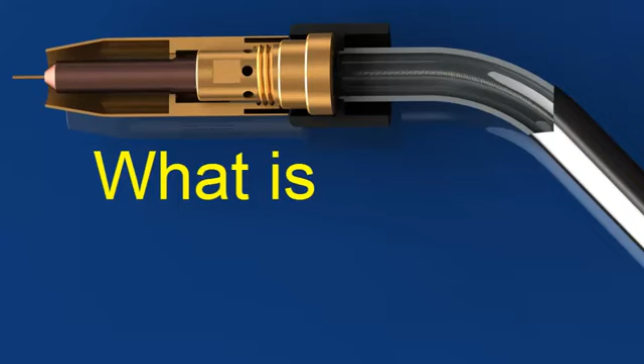What is MIG welding? MIG stands for Metal Inert Gas Welding. The American Welding Society calls this process gas metal arc welding, or GMAW. You might also hear it called wire welding.

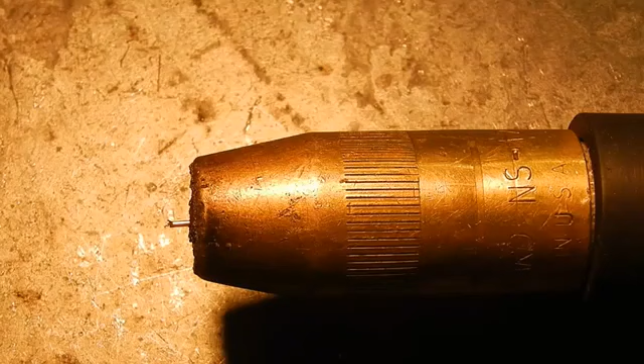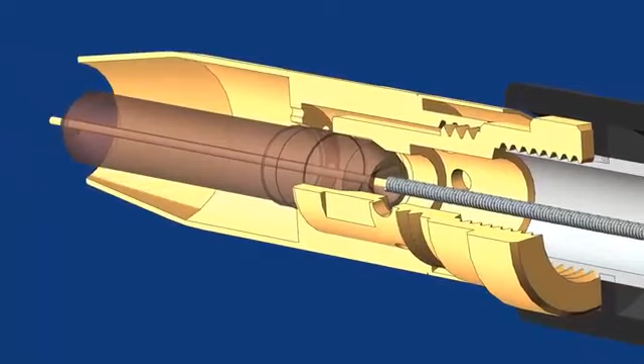In MIG welding, a thin wire acts as the electrode. This wire is fed from a spool mounted on a gun or inside the welding machine, through a flexible tube and out of the nozzle on the welding gun or torch. The wire is fed continuously when the trigger on the welding gun is pulled.

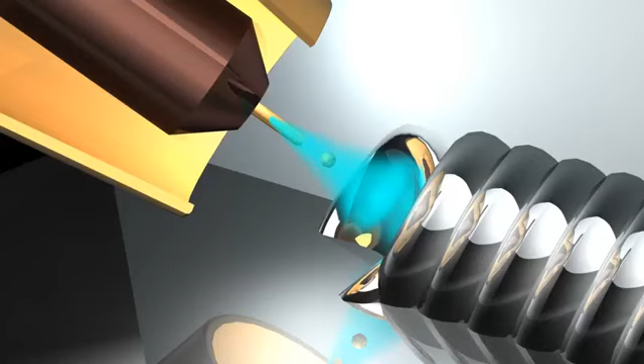When this trigger is pulled, it also switches on the welding current and a shielding gas. An electric arc forms between the wire electrode and the workpiece and heats both metals above their melting point. These metals mix together, or coalesce, and solidify to join the workpieces into a single piece.

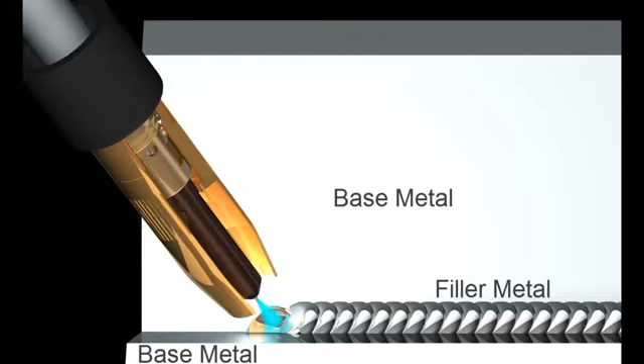The metal in the parts to be joined is called the base metal, and the metal that comes from the melting wire electrode is called filler metal. MIG welding always adds filler metal to the joint. Because the wire electrode melts as it's being used, MIG is called a consumable electrode process.

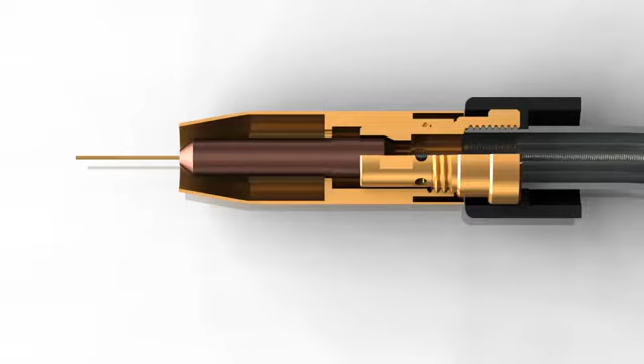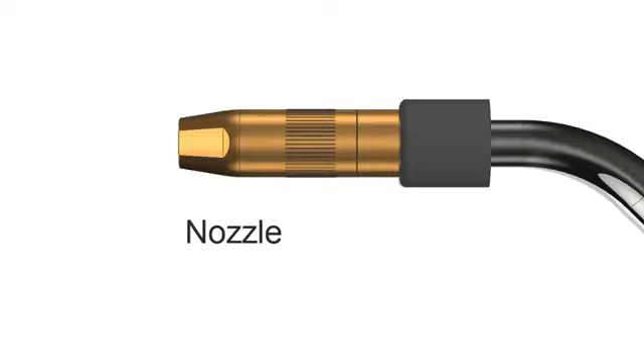Shielding gas is also fed through the welding lead. It goes through a gas diffuser and flows out of the nozzle. This shielding gas, which is often a mix of argon and CO2, protects the molten metal from reacting with oxygen, water vapor, and other things in the atmosphere.

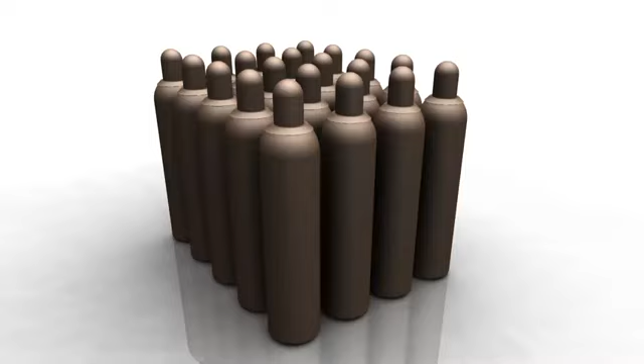The shielding gas is stored in high-pressure cylinders like these. The pressure is reduced to a usable level by a device called a regulator.

In MIG welding, all the machine controls are set on the machine itself. The most important of these are polarity, wire speed, and voltage. The trigger on the gun is just an on-off switch.

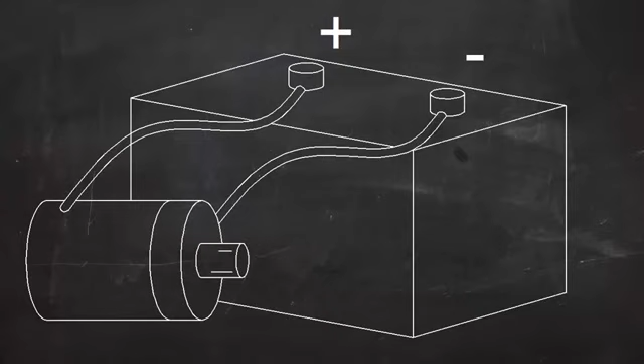For most MIG welding, the current is direct current, or DC. DC is like the current flowing from a car battery. One wire is always negative, and one is always positive. In DC MIG welding, the electrode is usually positive and the workpiece is negative.

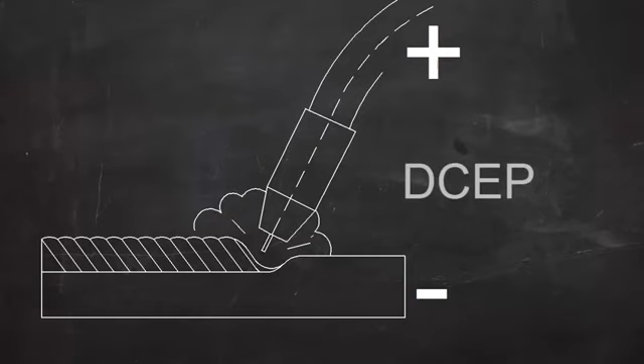The term DCEP is used, indicating that the current is direct current and the electrode is positive. This is also called reverse polarity, but DCEP is a more descriptive term.

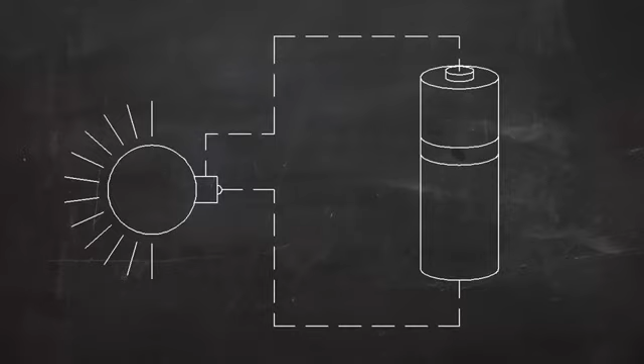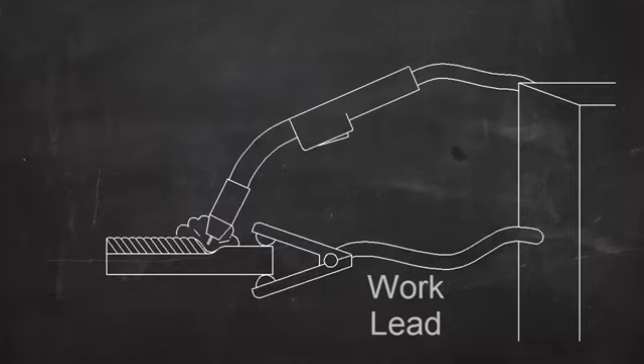In an electric circuit, the current flows in a loop. In MIG welding, the current has to flow in a complete circle from the machine to the torch, into the work, and back to the machine. A work lead is clamped to the work to complete the circuit from the workpiece back to the machine.

So, in summary, MIG welding is an electric arc welding process. It uses a consumable wire electrode, filler metal is added automatically, and the shielding gas comes from a high-pressure cylinder.